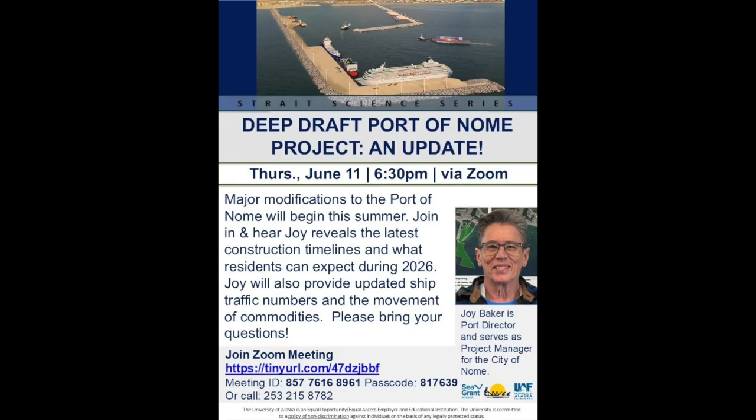So tonight really doesn't get too much more Bering Strait than to have Joy Baker of Nome talk to us about the big project we're all wondering on and waiting for, and that is the Port of Nome. So Joy Baker is the port director and serves as the project manager for the City of Nome. She's been involved with this project since, gosh, before it was born, I think, or maybe she'll fill us in on that. But tonight we're going to hear from Joy.

We'll hear about where we are, what's gone on up until 2025, as well as what we can expect in Nome during 2026. And she's open to all kinds of questions regarding the port and the project. So with that, Joy, if you want to put your video on and take it away. We're really glad you're going to give the story to us tonight.

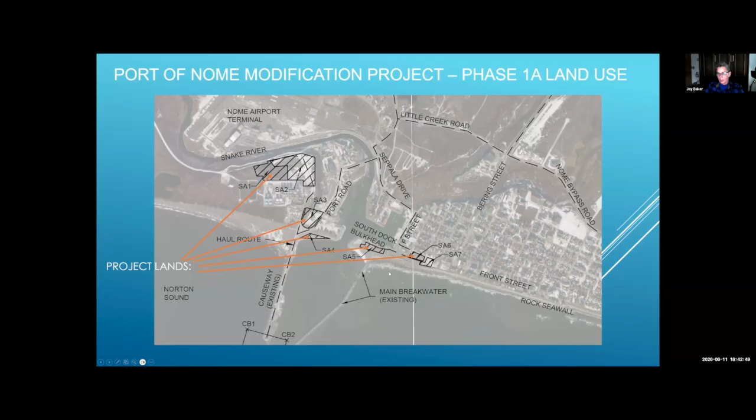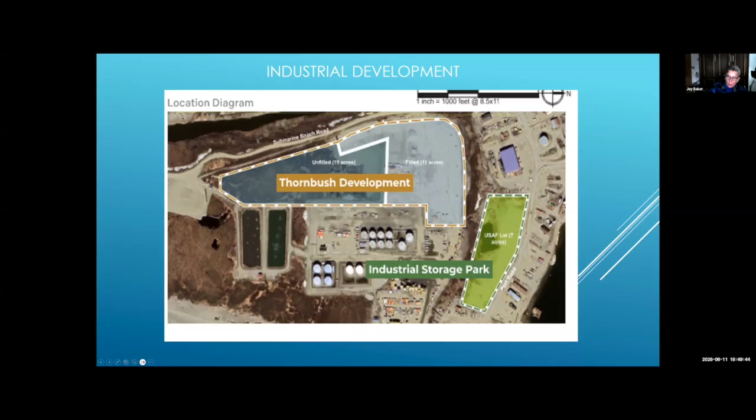Another project that is ongoing, the Snake River Moorage project I just mentioned, we were granted, let me think here. I've got so many projects moving in my mind, I have to narrow down to the one I'm talking about. A $13 million grant from USDOT with a $3 million match by the city. We have just received word that $1 million of that will be cost shared with the Denali Commission. We have 300,000 cost shared by this adjacent private property owner as a contribution, and we are talking with multiple other entities in Nome right now for assisting the city with the remaining 2 million, and that is making progress.

This LiDAR shot here is kind of cool. It shows an idea of what the facility is going to look like after it's constructed. 1,700 feet of floating docks, a 7-acre basin dredged to 8 feet. Uplands equal about 1.23 acres with potable water, power, garbage, restrooms, and parking.

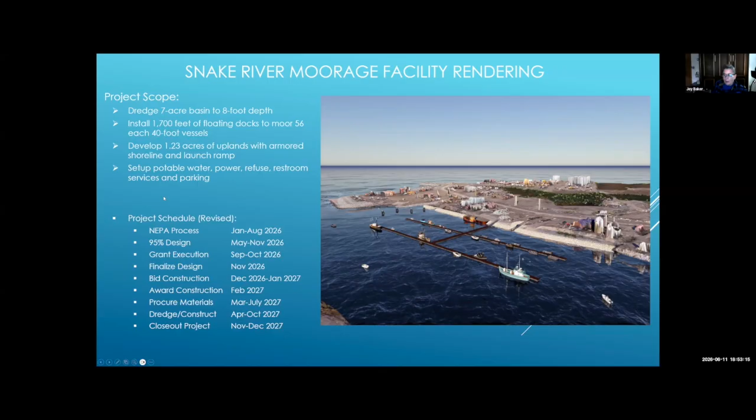So it's an optimistic schedule. It's possible that depending on how the stars align on the schedule you see here, we could have to ship the floats in by spring of 28, and then they would be launched. They will be removable floats, so if they come in too late in 27, then we won't install them. And again, they'll go in 28, and then the project will close out in 28.

There's a number of other projects we have going on at concept level. Looks a little busy, but I'm going to start with this center one here that has the red rectangle. That is anticipated to be a shower and laundry facility at the corner of Seppala and Belmont here, right behind the harbor master office. The location is still a concept idea where we think this is going to be built, but again, this is all 35% design and concept level for planning.

We've expended the funds to reach this concept level, but we will be pursuing grant funds for full design and construction, and we haven't yet targeted a funding vehicle. But as the grant NOFOs are released, we'll either be pursuing an application this summer, fall, or next spring. A lot of the NOFOs are issued in the first part of the year.

On the left-hand side here is what we call a Belmont Point development. Right now it's just a beach line. Those of you that live here know that. This would add some small armor stone as a protective barrier with some picnic facilities, fish cleaning, and a boat launch up at the north end, and fishing from the rocks here, and then additional parking. So obviously this is concept, and with more input from the locals, this will likely come to fruition because this is a great use of this part of the facility in the Snake River.

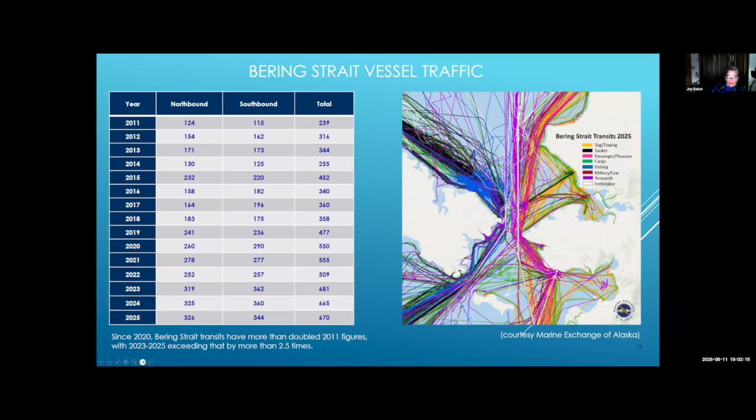So this shows the Bering Strait traffic and again, an increase in '25, 5 more vessel total transits, north and south, and they just keep going up. Again, over on the right, you can see the graphics and the different colors. It's kind of hard to break them out, but the different colors are for the different types of industry that are traveling through the Bering Strait. You get a little snapshot here of what's happening at the city, the Port of Nome, and you slide it to the next one.

This is actually the Port of Nome vessel traffic, what they call offshore, and then what's happening just out at the breakwater. I'm not sure why they break this out, but the color schemes really give you an idea of just how much traffic is transiting at the facility every year. This snapshot here is just as spider webbed as 24 and 23. It's a busy place. And here's a cartoon rendering of what the completed port expansion will look like when it's done. It's not to scale, but it gives you an idea of how it's going to look. And that is my last slide, gang.

All right. Well, thank you, Joy, for that rundown of the concept projects and timelines. So what is the final timeline? If everything goes as planned, when are we done with the whole thing? The whole thing? You mean the whole port, the entire project? Yep, the whole thing. The big picture. Yeah.

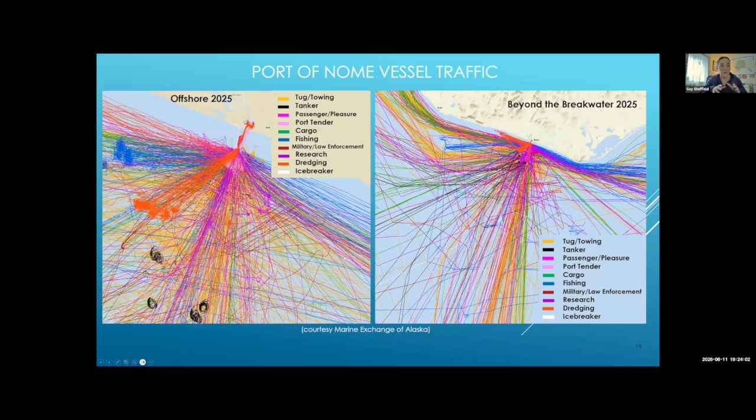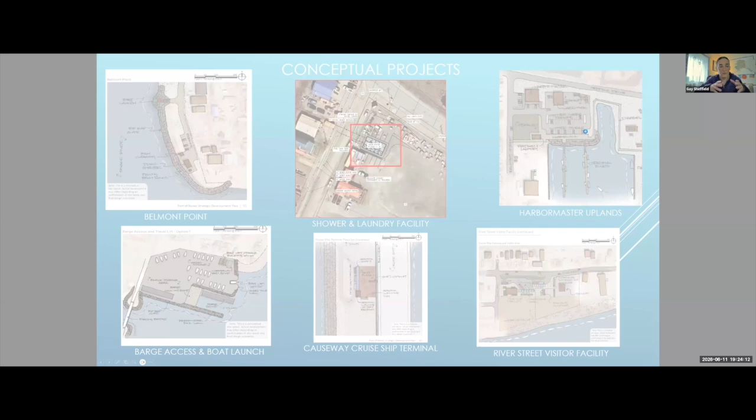And my question just is in the order of things. I think you did a good job showing it, but my question might be more for the Corps of Engineers, because my understanding is that 1A is this summer setting up, and then next summer shoot. Are we going to actually see the jetty go out, the West Causeway go out, or are we just going to be setting up cranes and things like that this year?

I don't know. Phase 1 is to get the West Causeway southbound. Yeah, there we go. That's it. So the west, right, it looks like the west. There we go. Thank you. So the west, yeah, we'll see that either start this year and then for the next year or two, that's going to be happening, right?

In 26, this little spur, this little tip of rocks that goes southeast off of the inline causeway, is going to be removed. August, September. That's the only in-water work that's going to occur. But we'll see lots of setup. There's going to be a lot of shoreside setup in various areas around town, around the port and out at the quarries, and not just the quarry, but the gravel pits.

And then in 27 they will start building out the breakwater in green here, and then start the dock when they actually get to that point, and that'll go 27, 28, and the Corps believes it'll blend into 29. We'll have to see how fast the contractor can get it built.

So then if you go back to the 1, 2, 3, and then phase two, this is my question, because Charlie was just talking about the dredging and the island and the washing out, and somewhere we're putting a pile of fines offshore potentially. So we do phase two and then we do phase 1B? Or is it going to go phase 1A, phase 1B, back to two? Or is this chronological? They're in the order. If you look at the dates, they're in the order of construction.

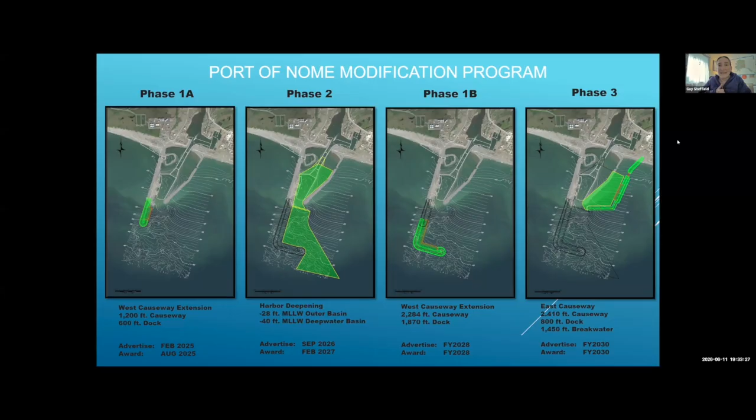And then we're going to have Kelly Capsar. She is a Michigan State University student. She's been studying industrial ship traffic in the strait itself from 2015 to 2024. Shannon, sounds like she could answer your question.

She's going to be talking about industrial ship traffic and the types of ships, what countries they belong to, where they're going, when they're going. And she's going to give an overview from 2015 to 2024 of industrial ship traffic in the strait. And she will talk about specifically how the traffic is changing and why. So that may be of interest to you. All right, thumbs up. If you can, I'll make sure you get a notification on that. And she may be able to answer also your question regarding the military and such.